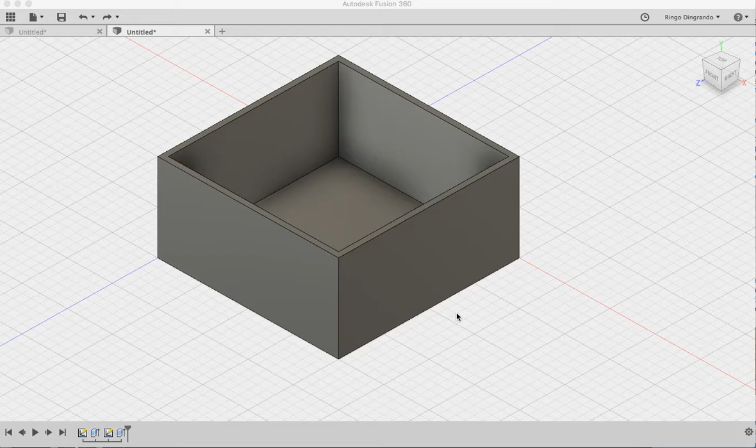One of my favorite ways of building small boxes or small box-like structures is to use the laser cutter. I'll use thin plywood and build finger joints into it, and then I can just glue together those finger joints with the plywood. I don't have to use screws, just glue.

So let's say I want to make a small box out of 3mm plywood. I've drawn myself first what I want it to look like. It's just a single body out of, I think, a 100mm box with 3mm thick walls. But I want to build it out of panels with the finger joints in it, and I want to design those panels. So I have my example box so I can compare it, and I will first work on my first panel.

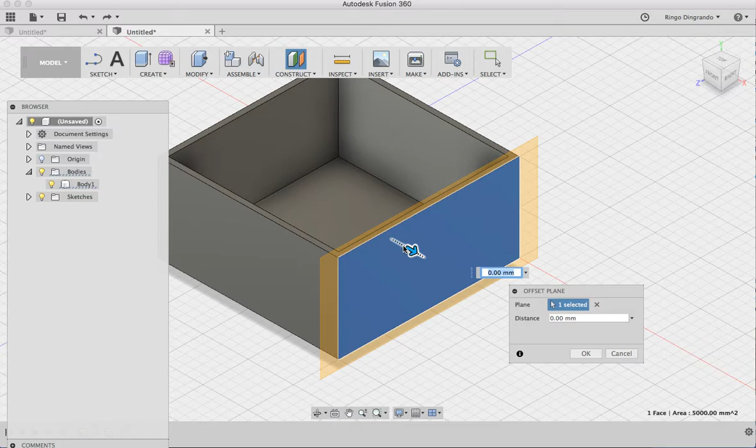So I'm going to construct an offset plane, and I'm going to move it off here maybe 40mm, and I'm going to click on that. I'm going to draw my first panel on this plane of the exact size of that. I'm going to pull it out to the thickness of my material, which is 3mm, and there's my new panel.

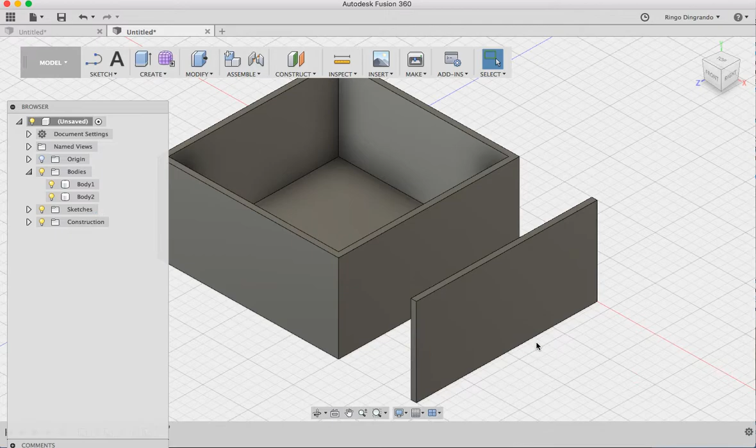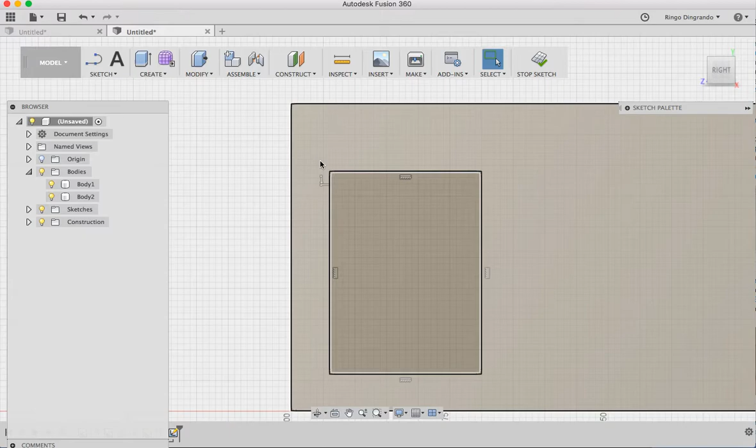Now I need to cut the tabs into it over on the sides. I'm going to highlight the face, hit R, and zoom in a little bit. Now, oops, that's not right. Go back. Highlight the face, hit R. The thing is I have to make the depth of the tab the same thickness as the material. The material is 3mm, so I need to make it 3mm in depth.

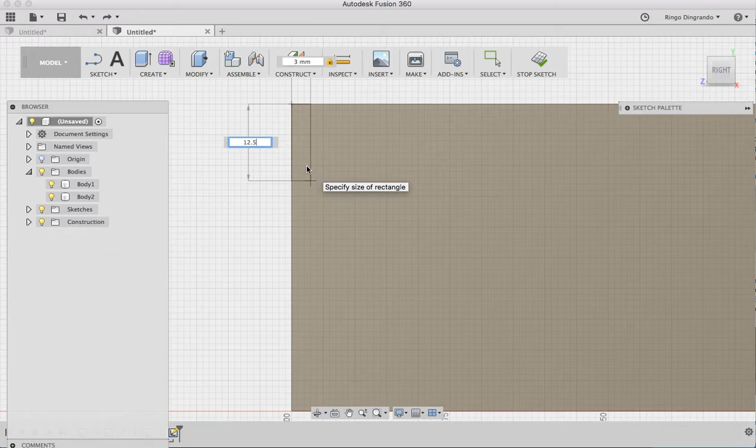The length of the tab can be up to me. It's going to work out good for me to do 12.5 because I happen to have a 50mm tall box. So I'm going to put that in. I'm going to do another one right here in the middle, and it's going to be 3 again and 12.5. And I've got that one.

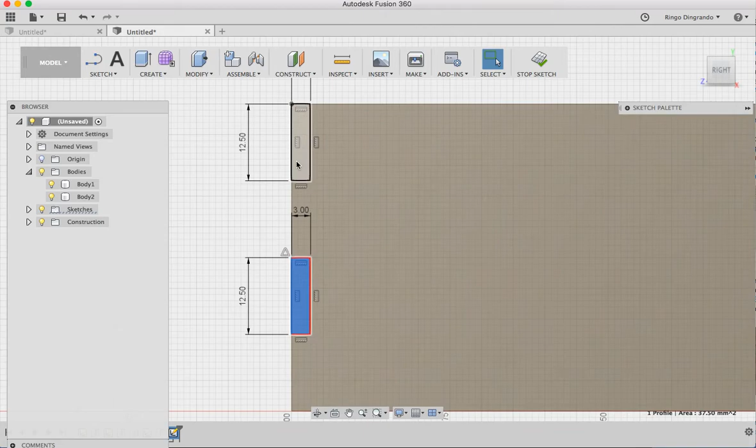I'm going to command highlight the other one. I'm going to go Q. I'm going to push those through. My material is 3mm thick, so I'll do -3. I should cut that away. And if I then go to look at this, aha! There's my tabs. I'm going to build some tabs on the other side that will fit into there. The panel will not be completely symmetrical, and you'll see why in a minute.

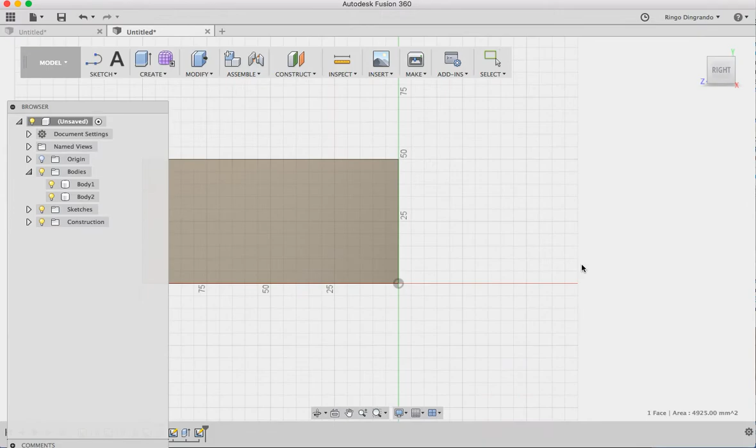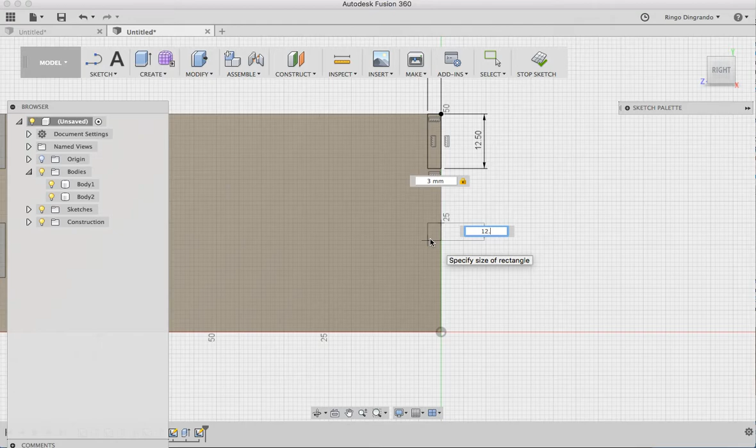So I'm going to do another rectangle, zoom in a little bit. I'm going to click here. Again, it has a depth of 3. This is going to be 12.5. I'm going to put another one on here at the halfway mark. Again, it's 3 and 12.5. There. Am I doing that right? Oh, I'm doing this in the wrong spots. I'm going to go back. So let me start over.

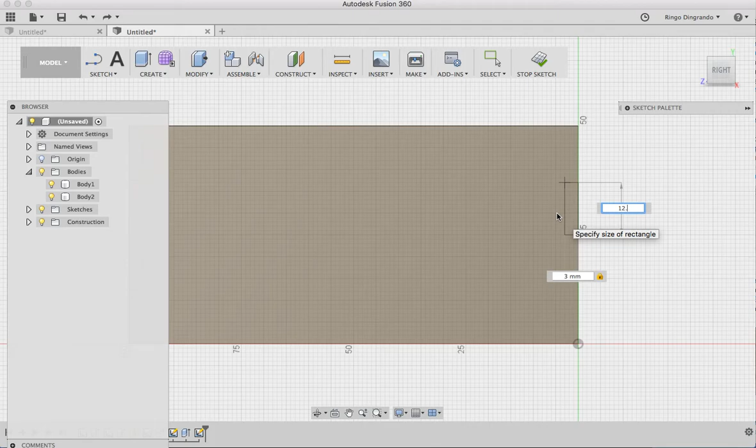R. I'm going to put that here, and I'm going to go depth of 3, and I'm going to go up 12.5. Put it there. I'm going to do another one down here in the corner. Depth of 3, height again of 12.5.

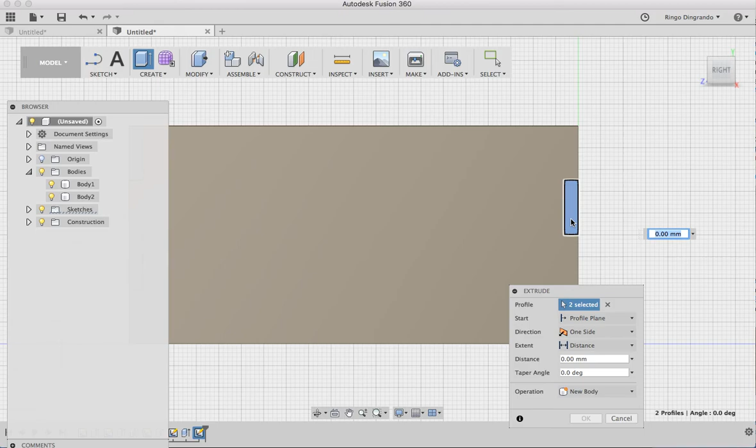I'm going to highlight one, command, highlight them both. Q for press-pull, -3 to push it out. And let's see how that worked out. There we go. Now I've got my tabs, and I can move on to the next step.